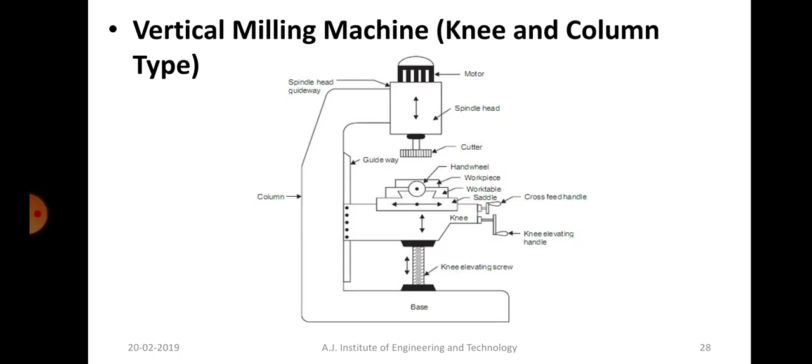Okay, so the milling operations are plain milling or slab milling, angular milling, face milling, form milling, slot milling, straddle milling, and finally gang milling. So you will have to study all of these milling operations, and definitely one or two or probably three also could be asked in the examination.

The question will generally be like that: explain the following milling operations, and they will ask at least two or three. They'll ask at least what is face milling, what is straddle milling, and what is gang milling. So you'll have to draw the sketch and give a brief description about these operations. So let's see one by one. What do you mean by these operations?

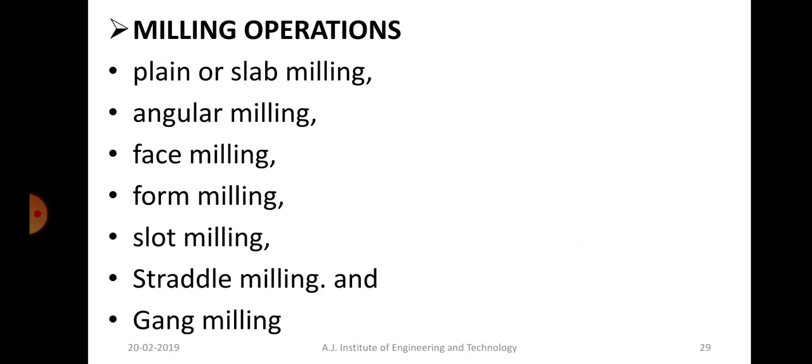Okay, first one is plain milling or slab milling. So plane milling or slab milling is a process used to mill flat surfaces of workpiece in such a way that the milling cutter axis is parallel to the surface of the part that is being milled. Plane milling or slab milling usually will have the workpiece and also the milling cutter in the same axis or in the parallel axis. They will be parallel to each other. The axis of the milling cutter as well as the axis of the workpiece will be parallel. And in this particular plane milling or slab milling, what we generally do is...

If you want to get a flat surface on the top, the workpiece may have irregular surfaces or shapes. So if you want to produce a flat surface on the top surface or an inside surface, you need to place that surface and the milling cutter will run over it. This is basically an operation to make flat surfaces. There is no cutting action taking place; you are only removing the irregularities from the surface and making it smooth or flat. This process is called plain milling or slab milling. As the name says, it's plane milling, or usually a flat surface is called a slab, and that's why it's called slab milling.

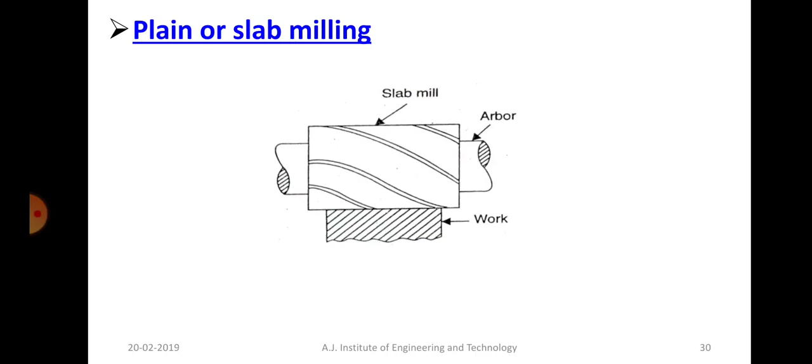Okay, second one is end milling. This is basically an operation performed in a vertical milling machine, and as I told you, plain milling or slab milling is probably done using a horizontal milling machine. So you have seen both horizontal milling machine as well as vertical milling machine. One of the differences in application is: plain milling or slab milling is usually done on a horizontal milling machine, and end milling is usually done on a vertical milling machine.

In case of end milling, it is a process used to mill slots, pockets or keyways in such a way that the axis of the milling cutter is perpendicular to the surface of the workpiece. I hope you understand the difference between the previous one and this one - in this case the milling cutter axis is perpendicular to the surface of the workpiece, it's not parallel, it's perpendicular. So it's basically used to cut keyways or a particular slot or pockets.

As you can see in the sketch, only a portion of the workpiece is shown. So in the current position, if you extend that cutter from one end to the other end, you usually get a slot or a rectangular or square slot over the length of the workpiece.

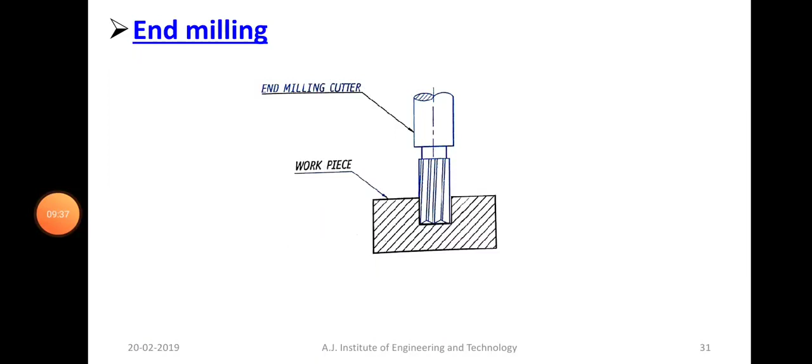Okay, so next one is called slot milling. Slot milling is basically a process of milling in which slots of different types are cut using a drill which is generally called a slot drill - the slot drill which has a capacity to cut into different slots given. So slot drills are basically used in cases where it takes a lot of time to pre-drill a hole for an end mill, and there is no enough room for the end mill to plunge into a helical portion.

Okay, so slot drill is basically done, which is almost similar to end mill, but a slot drill has a capacity to cut into different types of shapes. So when we say end mill, generally the end mill can be of only a rectangular or a square section. So slot drill can be any particular slot. So you need a different type of drill for a specific kind of a slot. So if you want to have a dovetail slot, then it has to be a different drill, that is, milling cutter that has to be used. If you want a triangular slot or a rectangular slot, so depending on what type of slot you want, the slot drill has to be different.

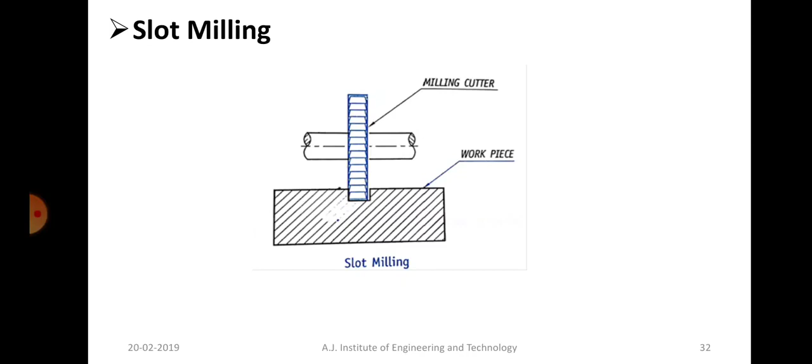Okay, so next one is angular milling. An angular milling is a milling operation that is used to mill flat surfaces that are neither parallel nor perpendicular to the milling cutter axis. So angular milling is usually done to mill particular surfaces, a flat surface, that is generally not being parallel, neither being perpendicular. So you need to cut the particular face at an angle. So in such a case, you will have to use an angular milling cutter.

So generally these are used to cut surfaces like a dovetail, grooves, or chamfers, or any serrations that has to be made. Okay, so you know the shape of a dovetail, right? So it will not be flat, it will have an angle on the side. Okay, so what has to be done is the milling cutter has to go at an angle rather than going either parallel or perpendicular to that.

So it is very easy to cut a square or a rectangular slot because they are perpendicular to cut. But if at all you want to cut a dovetail shape or any particular angular shape or any chamfer to be given, then it is not possible for a milling machine to directly cut into a chamfer. So it has to go through at an angle over the surface. So in such case, we are using a milling process that is called angular milling.

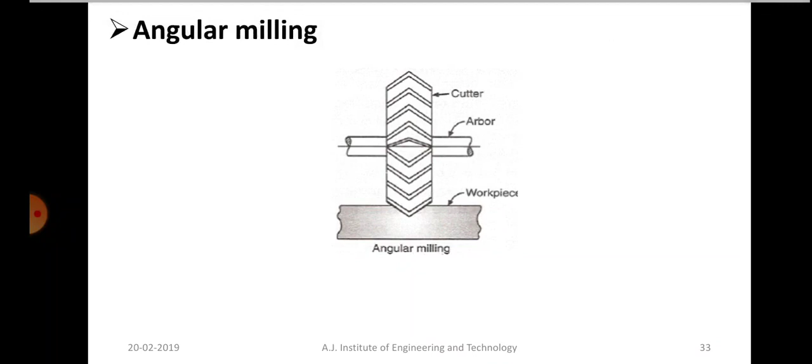So next one is called form milling. In form milling, if at all you want to cut a slot which is neither rectangular nor angled, if you want curves or any particular contours, then we have to use a separate cutter that is called a form mill cutter. Form milling is basically a milling process which is used to machine special contours consisting of curves and straight lines. It can be having straight lines or it is generally a complete curve. Okay, so it's very difficult to cut curves in case of using end milling cutters. So we need to have a particular form milling cutter which will be having the shape exactly to the contour that has to be milled.

Okay, so that means it is something like, if you want a curve, for example, if you've seen the sketch here, in this particular form milling cutter, you will get a U-shaped contour because the form milling cutter itself is like that. So if you want any particular shape with irregular curves, then you need to use a different form milling cutter depending on what sort of shape you want. Okay, so that type of milling operation is called form milling.

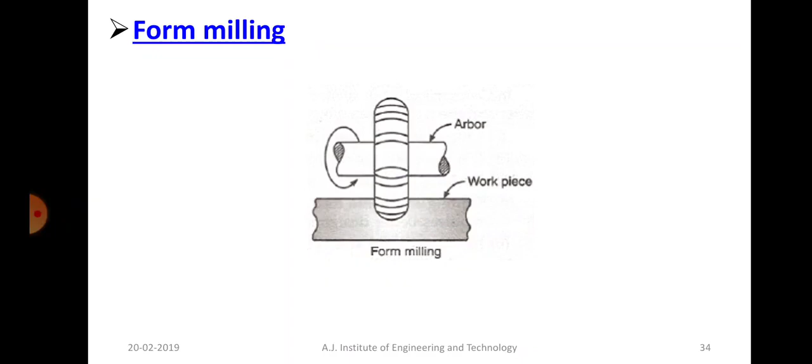Okay, so next one is called straddle milling. So what is straddle milling? So generally you can see in most of the milling operations, there is only one milling cutter. But in case of straddle milling, you usually have two milling cutters separated by a distance. So what exactly happens in the case of straddle milling is that you have two parallel sides.

Let's say you are supposed to do slab milling or plain milling to one side and on the other side as well. So if you're using a slab milling or a plain milling cutter, what happens is you need to fix the workpiece in such a way that one surface is there. You need to completely do the process once on one of the surfaces. Then you have to again remove the workpiece, change the attachment, turn it to the other side, again fix the workpiece, and again do the operation. So that means you're doing the operation twice to mill it on either side.

Rather, if you are using a straddle milling operation, what can be done is the workpiece will be fitted in such a way that the two milling cutters will be placed side by side and the workpiece will be placed in the center.

So in case of straddle milling, if you place the workpiece in such a way that the two milling cutters are side by side, they can perform two slab or plain milling operations simultaneously.

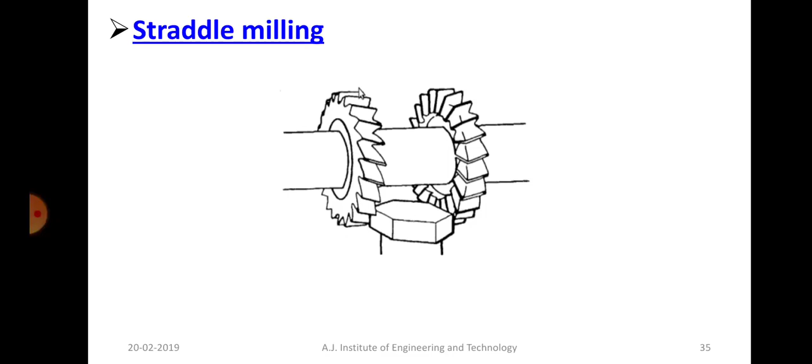So to explain more about what is straddle milling, we have an animation of the straddle milling cutter which I will be playing next.

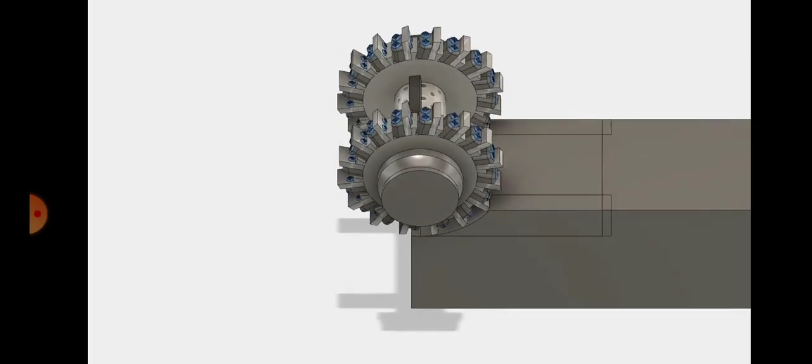As you can see here, there are two milling cutters which are made to go over the workpiece. As the milling process is happening, you can see that they are simultaneously machining two surfaces on either side. That means you are basically using a single arbor and you are using two milling cutters side by side.

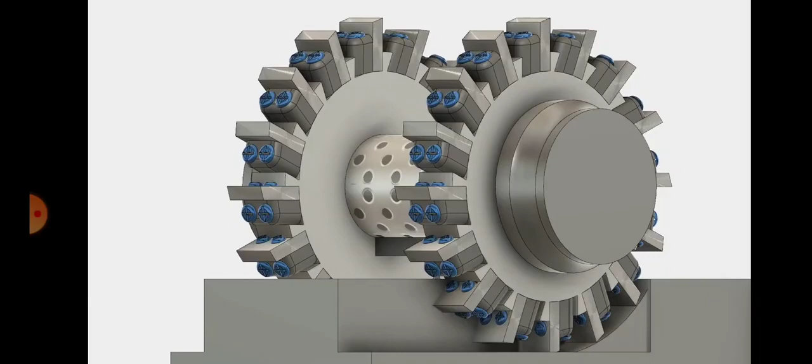That means, as I've told you, suppose if you want to have multiple milling operations performed on the workpiece, instead of doing it individually, you can use a gang milling cutter and perform all the operations simultaneously, because all the milling cutters are connected to a single arbor. The milling cutters will be rotating and you place the workpiece depending upon the requirement.

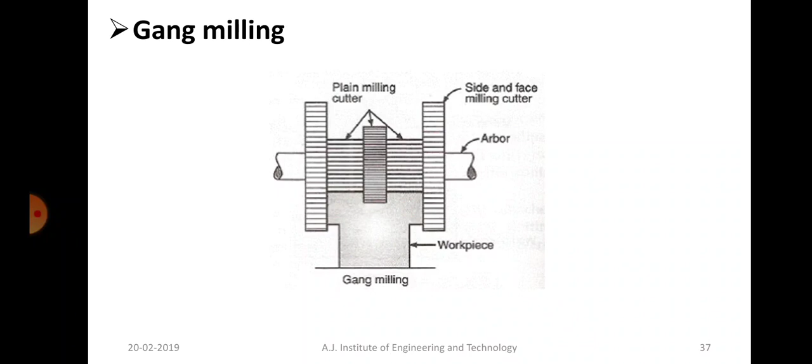So this is the entire portion coming from module 5, the first part. We have finished lathe and its operations, then milling and its operations. Next will be the continuation of module 5 itself, but that is a separate section - advanced manufacturing systems - which we will be studying in the next class. Okay, thank you.